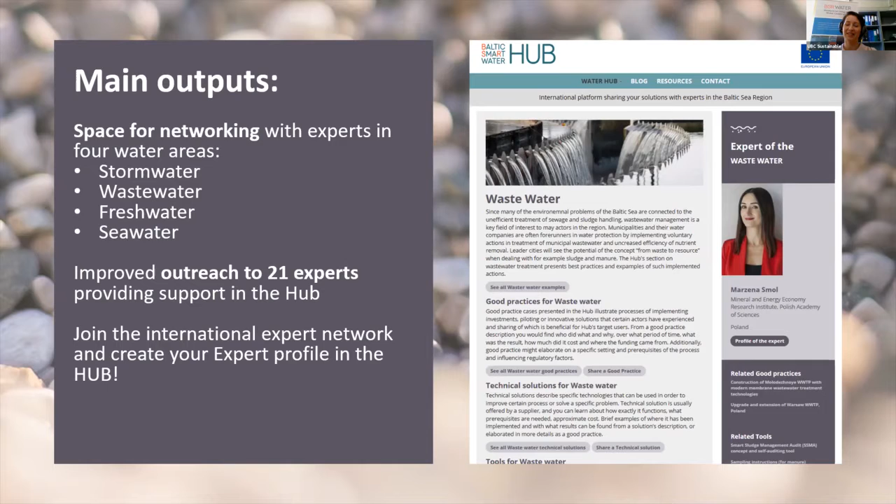So whether it's a good practice, which is a wider application with concrete results of a solution, or it's a description of more technical specifications of a solution, or it's a concrete tool to take up, or an innovation, which is something completely new based more on the newest research. And that's how a concrete case is described in our hub.

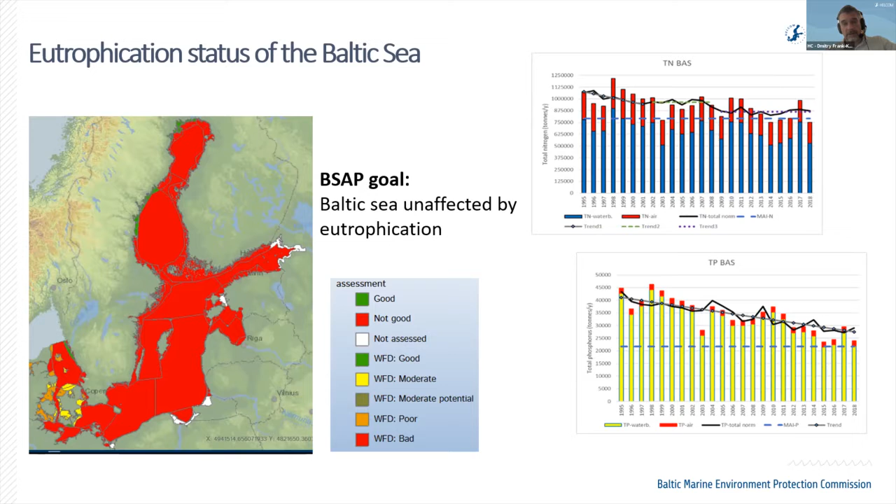So you probably know that despite the whole effort to abate eutrophication of the Baltic Sea, it remains in eutrophic conditions. And as you can see on the diagram to the right of the screen, especially input of nitrogen. This is actually a new picture which was just a couple of months ago published, and it covers the time series from 95 to 2018. And for the first time we can clearly show with all statistical instruments that there is no progress in reduction of nitrogen input in the last decade, somewhere since the middle of the 2000s. It's a much better situation with phosphorus, but what happens with nitrogen is plain stagnation.

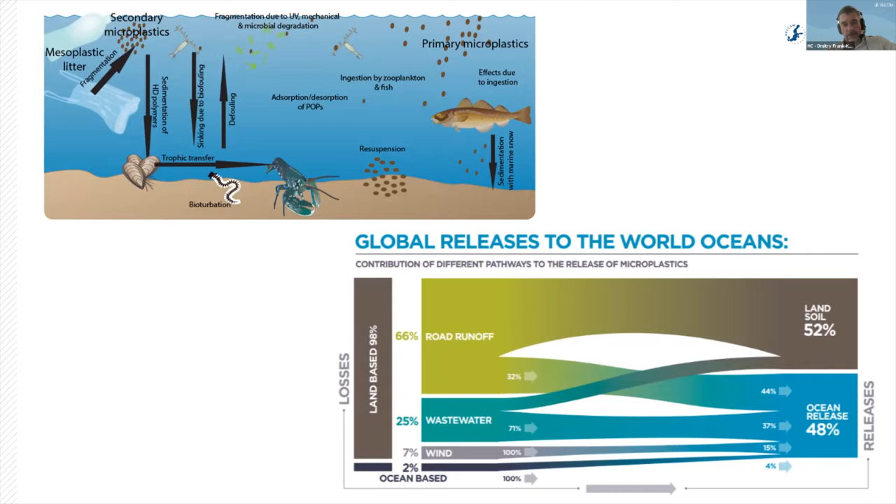And stormwater, I suspect you are well aware about these diagrams, which originate from the NonHazCity project. So you can see that stormwater will contribute to this process with either heavy metals or other organic contaminants. What concerns the microplastics, these are global studies. You know that there are two types of microplastics, primary and secondary. But if we speak about primary microplastics, which come from land-based sources, road runoff is a purely dominating source for them.

It is a remarkable source of nutrients. This is a pathway for a good bundle of hazardous substances. This is one of the major sources of microlitter, and this is a subject of high concern in terms of climate change. So all those prerequisites definitely push HELCOM to do something about stormwater management.

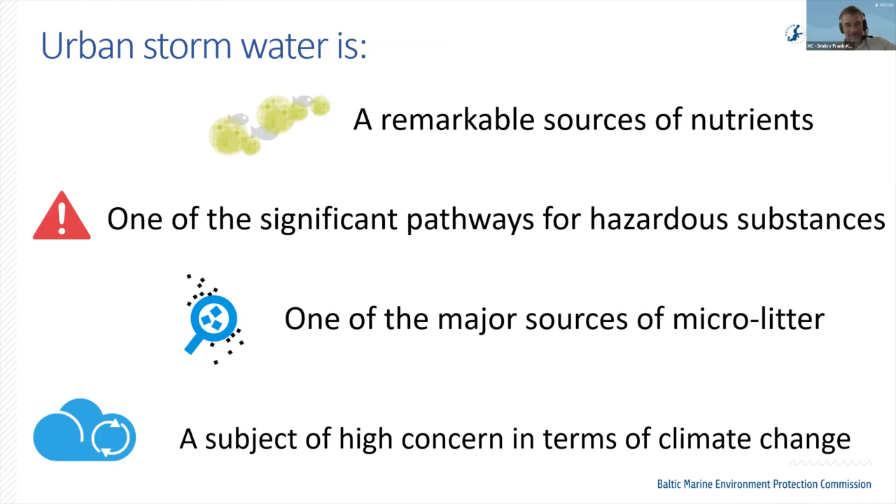Actually, what can HELCOM do? You know that we are not investing, we are not building stormwater systems. What we can do, we can organize a dialogue between contracting parties to the Helsinki Convention using this statement, Article number 3 of the Helsinki Convention, as a starting point. And this says that the contracting parties agree to undertake all measures to eliminate pollution of the Baltic Sea. And this is the only legally binding HELCOM document.

It means that this is a part of our international legislation, legal framework, and mandatory for implementation by all contracting parties. But this is definitely quite a general statement, which can be specified by various other documents. Actually, this is our main work, to produce documents. You can see the hierarchy. All these documents which are listed here are actually politically binding. For example, the Baltic Sea Action Plan.

Probably you know that now we are in the middle, or I would say at the final stage, of the update of this Baltic Sea Action Plan, which is our main regional policy agreement on implementation of the Helsinki Convention and achievement of the good environmental status of the Baltic Sea. But how concretely it should be done is described by HELCOM recommendations. Again, HELCOM recommendations are politically binding documents.

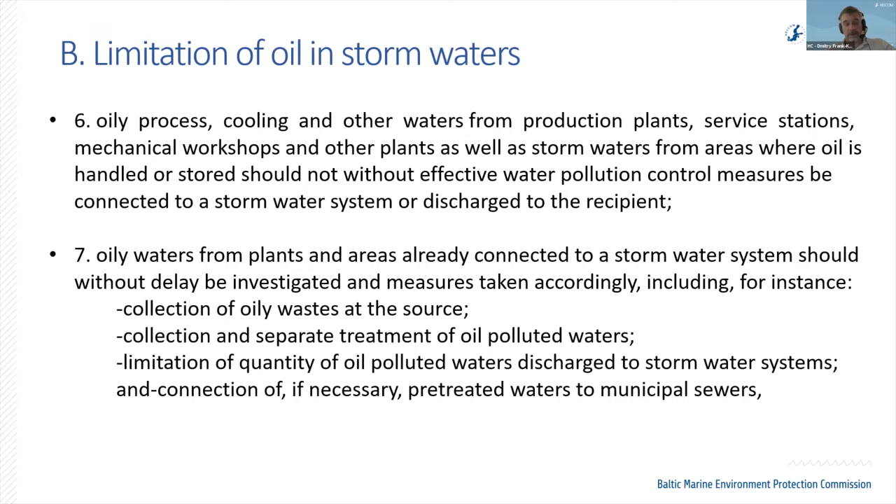And actually, the original recommendation had a number of provisions aimed at preventing pollution, but the main focus was actually oil. And this was the only pollutant which was addressed by the recommendation. And of course, it didn't take into account either climate change aspects or microparticles or anything else. So it was clear for everyone that the recommendation had to be revised.

And a new version was produced, as I already said in the very beginning of this presentation, with good input from the BSR WATER project, and particularly from our colleagues from Riga and from Helsinki. But that was not the only contribution. Also Coalition Clean Baltic contributed a lot, especially with regard to provisions related to mitigation of input of microplastics into the marine environment. So the recommendation was significantly expanded.

Now it includes three main parts: addressing planning of stormwater, specific measures aimed at reduction of discharges, and some specific actions addressing management of high-risk stormwater. And also this recommendation contains two annexes. One, supporting information, describes some concepts which are recommended for use in this recommendation. We will speak a little bit more about them. And then in the end, the reporting format, which unexpectedly became one of the main obstacles for contracting parties, and it was not agreed in full scale, but as a provisional reporting format.

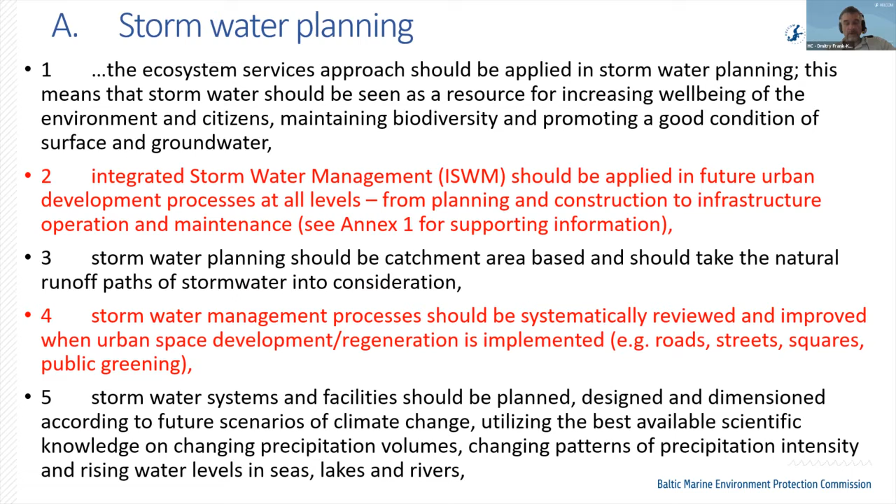Then we recommend that stormwater planning is based on the catchment areas, which actually also caused some discussions between contracting parties. For example, raising the issue of heavily altered natural areas, where we can hardly speak about proper catchments of any water bodies. But anyway, this is recommended whenever it is possible to do. I think these are the main points from this part on planning.

And in the second part of stormwater planning, we also address mainly climate change issues, which means that, first of all, there should be protection of the existing systems against overflowing. And it can be done by building secondary runoff paths.

Then it is highly recommended that all municipalities and all who are responsible for stormwater management would develop water policies, and these water policies and the whole system take into account climate change future scenarios. I know that in many cases it is not done. So actually, all construction is based on past observations and long-term weather or climatic parameters, but hardly takes into account future climate change and future scenarios.

With regard to prevention of contamination and discharges from water, the first thing which is recommended is a so-called hierarchy for stormwater management solutions. It starts from utilization at source, which means organization of areas where stormwater is naturally filtrated into soil. And the most unfavorable solution, but unfortunately unavoidable, is combined sewer systems, when stormwater is mixed with wastewater and directed to wastewater treatment plants. But this is unavoidable. We know quite well that there are many historically built areas where no other solution than the last one is possible.

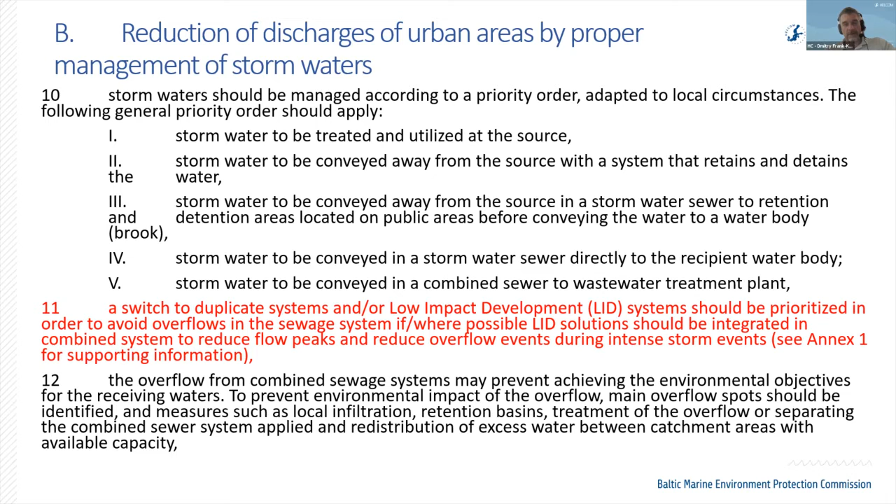But anyway, the general principle is that stormwater shouldn't be flushed directly into the recipient water bodies, but should undergo treatment in retention bodies to retain nutrients, sediment particles and other substances. Many recommendations are also aimed to prevent flooding, which really poses high risk for the aquatic environment.

Then, of course, one of the prerequisites is assessment of the impact of stormwater. Of course, we keep the same. Actually, it is almost transformed from the previous recommendation that measures are to be applied at source to minimize contamination of stormwaters. And finally, what is really new, but probably not applicable for the whole catchment area, is the recommendation to prevent or even ban any dumping of street cleaning snow into water bodies. And I know that in many places it is already implemented.

And finally, with respect to high risk stormwater management, the main recommendation here is that stormwaters from contaminated areas are to be investigated first and treated appropriately on site before discharging into any stormwater management systems.

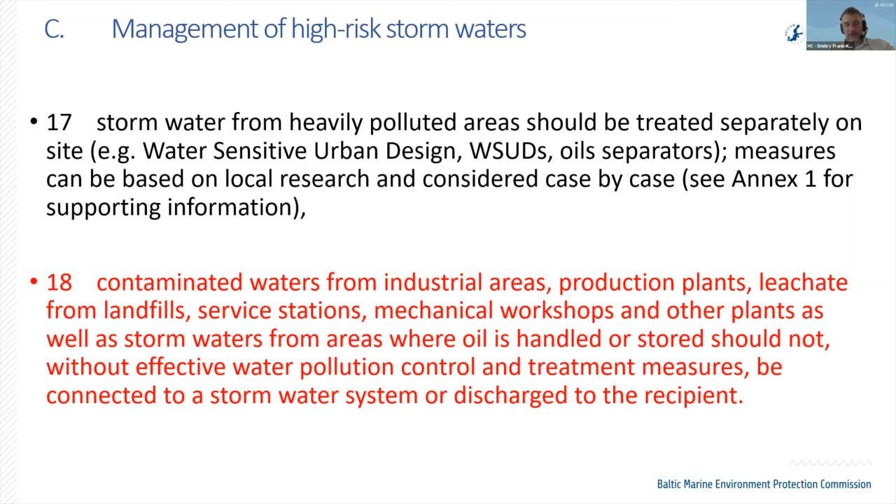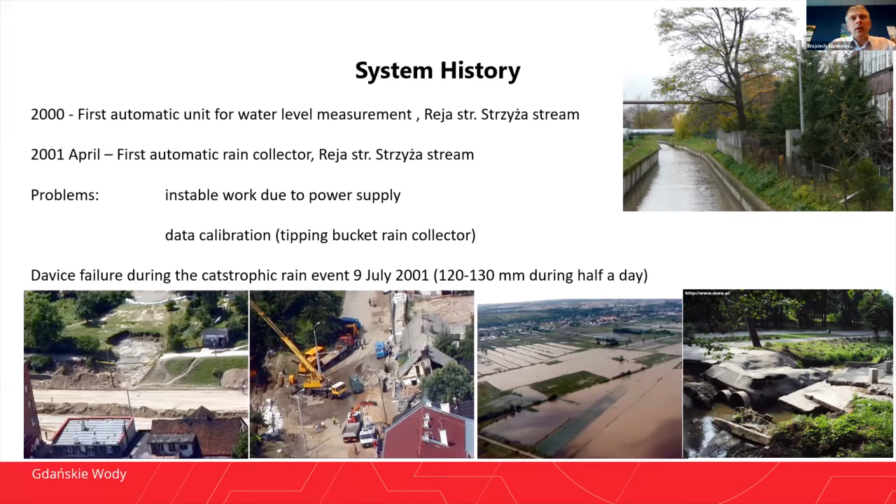Of course, it was the first collector, so we had some problems with unstable work and power supply, and during the first catastrophic rain in this century, the 9th of July, 20 years ago, we had some problems with the data collection, so our information is from the national system and also the Gdańsk University pluviographs.

So during the next years, Gdańsk Water with the City of Gdańsk mounted 7 automatic rain collectors in different places, and this is the base units for the system in Gdańsk. And the next step was the cooperation with Gdańsk University of Technology, and I think Michał will better describe it.

Yes. So in the years 2011 and 13, we started the cooperation between the university and Gdańskie Wody, in collaboration with the Provincial Fund for Environmental Protection and Water Management in Gdańsk. So we undertook the implementation of the stormwater monitoring system in the Strzyża basin. We chose this pilot basin because it is, as Wojtek said, one of the hardest ones. And it was possible to start the project called Monitoring, Modeling and Analysis of the Flood Risk in a Small Urban Catchment, the Strzyża case study.

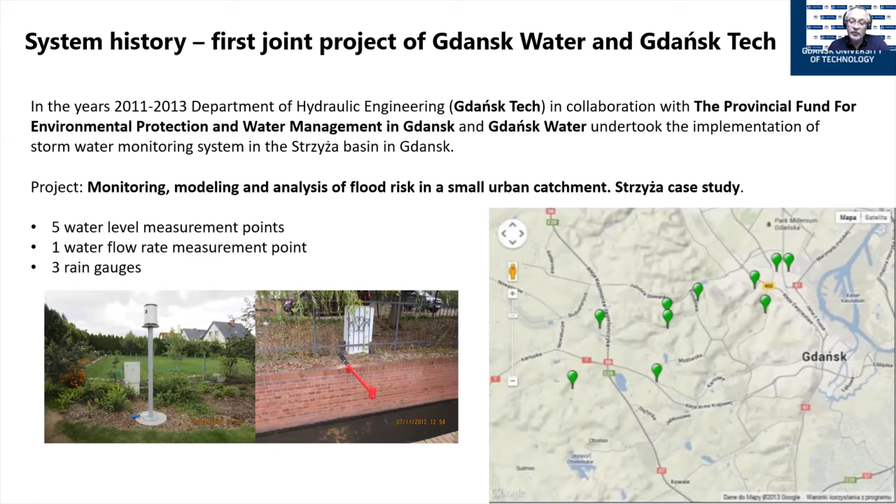And in the frame of this project, it was possible to buy and install 5 new water level measurement points, 1 water flow rate measurement point, and 3 rain gauges. It took 2 years to start with this system, and we started the collection of data about the precipitation and the outflow from the catchment. So it was a beginning, and 2 years later we started the second project related to the Strzyża basin.

It was called Stormwater and Snowmelt Runoff Storage Control and Flash Flood Hazard Forecasting in the Urbanized Coastal Basin. Again, it was a project between two cooperators, Gdańskie Wody and our university, and again it was funded by the Provincial Fund for Environmental Protection and Water Management in Gdańsk. In the frame of this project, we could install 8 new water level measurement points in the Strzyża basin, especially in the retention reservoirs, and we started to build the hydrological model of the precipitation outflow modeling problem. Wojtek, next slide, please.

Shortly, the results of cooperation. After completion of these 2 projects, all measurement stations were taken over by Gdańsk Water and included into the municipal monitoring system. So it is a profit for the city, of course. On the other side, thanks to the municipal meteo and hydrological database, the scientists from our university can conduct research on the changes in hydrological processes in urban basins. So it is a great profit for us, for the university.

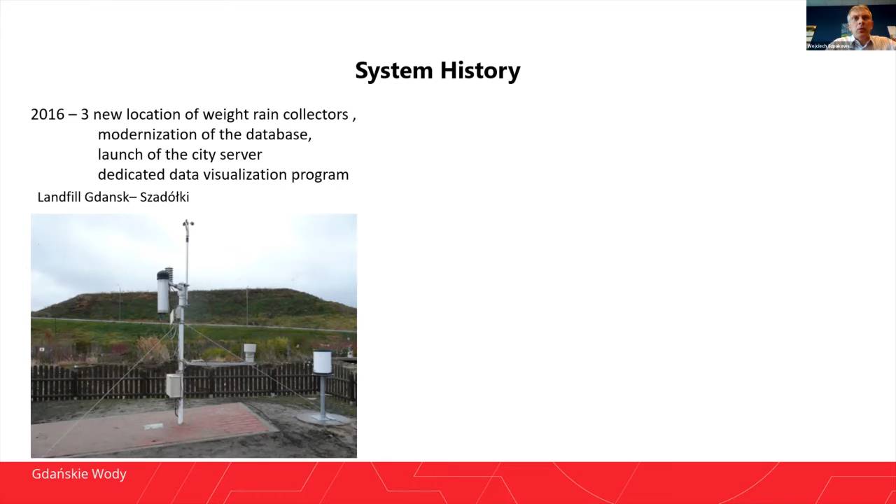Thank you. It can be said that a result of this cooperation is also my position in Gdańsk Water, because close cooperation is also personal cooperation. So the next step was localization of the weight rain collectors, and the results are, I think, the most stable. So in 2016 there were 3 new locations, and the huge improvement of our system was done in 2017 and 18, when we installed, thanks to European funds, 55 new water level units, a meteorological station in the center of Gdańsk, and new weight rain collectors.

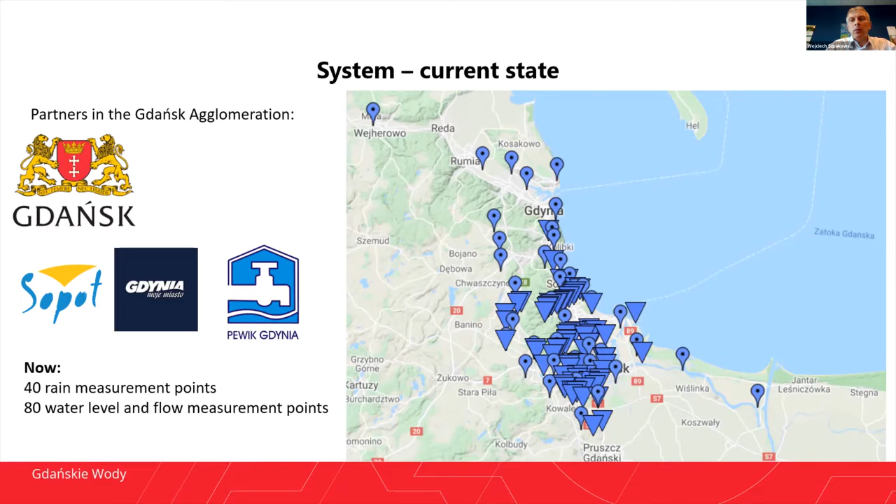We used the technical standard of the Institute of Meteorology and Water Management, and these weight collectors now are, I think, the best as a local system in Poland. The present situation is seen in this graph, where you can see the rain collectors and the water level units. We now have cooperation with cities close to Gdańsk, Gdynia, Sopot, with the PEWIK company, which installed rain gauges in Wejherowo and Rumia, and this is very important for all works and information about precipitation in the whole Gdańsk agglomeration.

The problems, the challenges, of course, you see: pollution, devastation, data transmission errors, calibration, data registration errors. So we have in Gdańsk Water a group of people who handle the maintenance of the system, and problems are rapidly repaired.

The role of the system is very important, and you can see July 2017, when we had rain of more than 100 millimeters in 40 hours. And thanks to this system, we prepared good water management, and there were no damages in the city. You see this Strzyża system and reservoirs Kiełpinek and Srebrniki, and also you see the Matemblewo

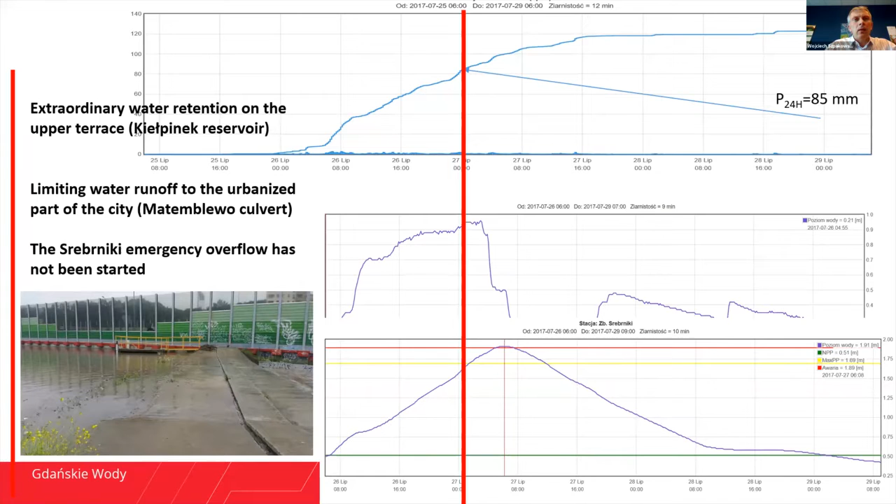culvert. This is the border between the forest and the urban part, the lowest part of the Strzyża stream. And thanks to this system, we saw that 85 millimeters after the first 24 hours gives us a very huge level in this Srebrniki reservoir, and we decided to block the flow from the upper terrace to the down city. In Srebrniki, we reached the water level equal to the emergency overflow. But this was the huge level, and there were no damages.

In the years 2018-19, we had some flash flood episodes, and you see this episode from the 11th of May, when during 30 minutes we noted more than 30 millimeters, nearly 40 millimeters. And you see here the 3 national meteorological stations, and their points were outside the rain event. So the net of our rain collectors is very important, because the small flash floods, more intensive rain, are not registered by the national system.

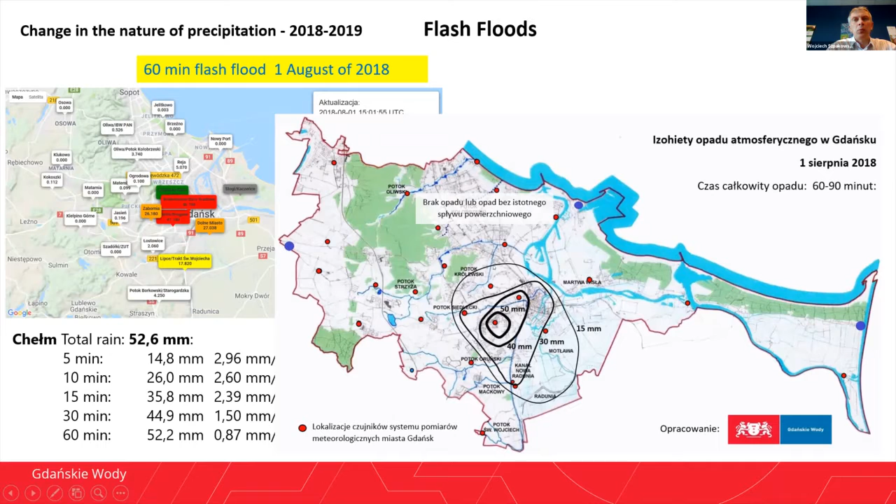And next, you see the highest value. It was the 1st of August 2018. In 60 minutes, we registered in one station more than 50 millimeters. So of course it was some perturbation in the system in Gdańsk. And a very interesting situation was the 10th of June, not this year, but 2 years ago. Sorry for the mistake. We noted 2 flash floods during 3 hours. The total sum of rain was 40-60 millimeters.

We have also some advantages of the system. For example, the very speedy information on social media, and the media of Gdańskie Wody, Gdańsk Water, have a huge audience, more than 10,000 people, and this information is very rapid, very important during the rain moment. And that's why Gdańsk started to change the rainwater management policy. It will be shown in the next presentation. The moment was the year 2018, when stormwater was no longer counted in law as wastewater, but as a source which we should manage.

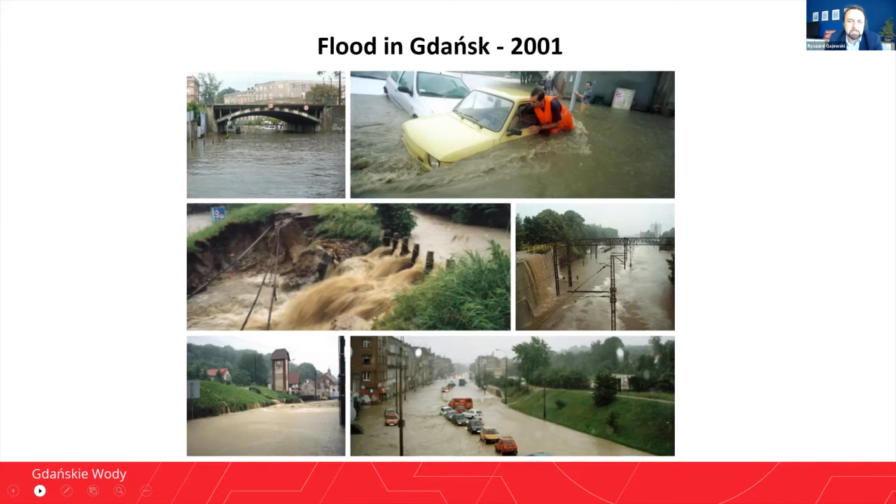It was rain of about 140 millimeters. And 15 years later from this event, we had again a big rainfall, which was about 170 millimeters, and there were also many damages. But in the meantime, the city implemented many water reservoirs, so the damages were not as big as 15 years before. So we expect such events will occur in Gdańsk very often. We face climate change. And we also observe from our monitoring system that the intensity of rainfall is increasing.

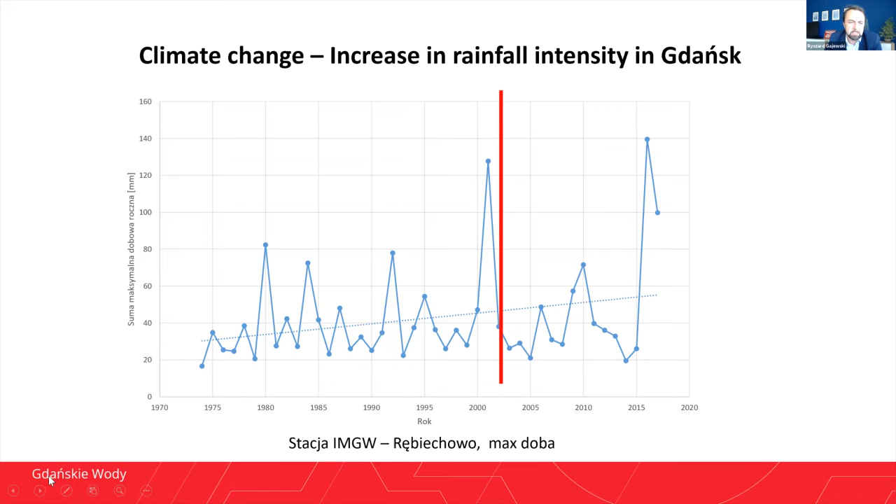When we think about the business of stormwater management, we have to also take into consideration climate change, and we think that we should rather start to name it adaptation to climate change, because this is not only stormwater management. And let me analyze this sentence. What does it mean? How should we treat it?

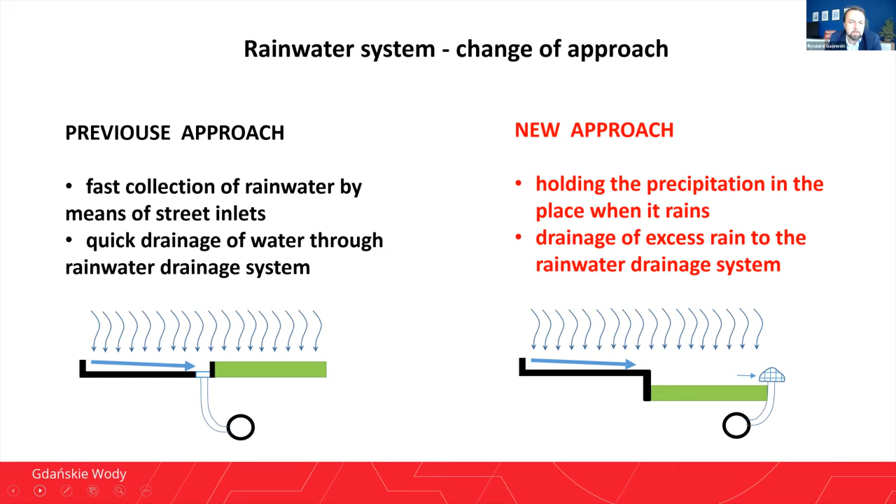So as a result of this new approach, we formulated 3 levels of rainwater management. The first level is concentrated at the property area. The second level is a bigger scale, the urban system, and the third level is crisis management when these 2 levels are insufficient.

So starting from the first level, concentrated retention at the property area, it is addressed mainly to the owners, and we demand that they retain 30 millimeters of rain when the property has a connection to the rainwater system, and if not, 60 millimeters, and also when there is a difficult catchment area. This rule also applies to roads and public places.

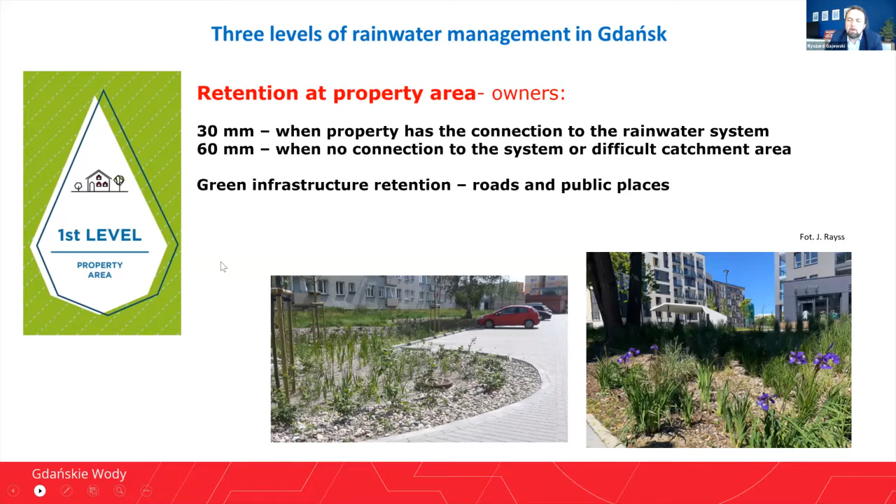How do we implement this level? By means of nature-based solutions, such as rain gardens, bioswales, retention parks. Our company is implementing these solutions as demo sites, and we want to show people, show investors, that it's possible, that you can do it as well, and it's working. More about these tools will be in the next presentation.

And also we think that these tools can be implemented on different scales. Starting from the property, this is the smallest scale. Then the bigger scale is the district area, where bigger objects can be implemented. Then we have streets, where along the streets or between the pavement and the road, we can implement different greenery solutions to retain stormwater.

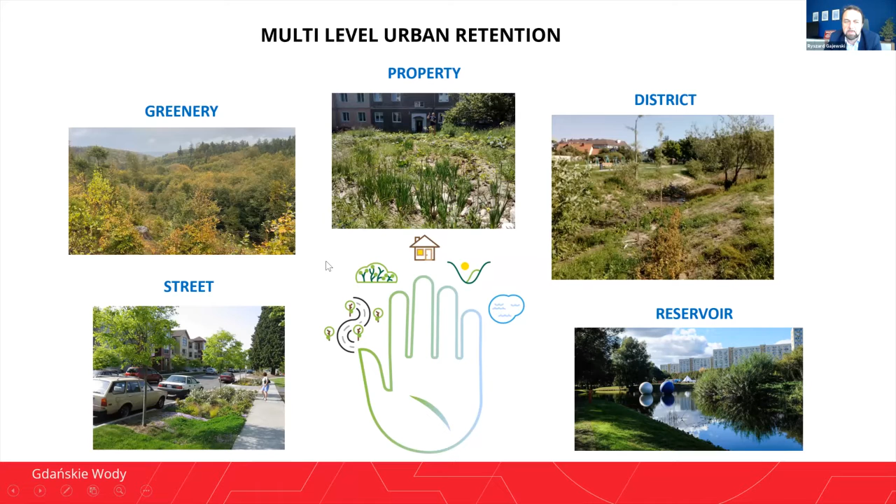The second level of our system is these water reservoirs. So when the first level is insufficient, water goes by means of the drainage system to the water reservoirs, and this is the last place where we can stop the water. These reservoirs are designed for the rain which occurs once per 100 years.

And we have quite a big system of water reservoirs in the city. There are 54 such reservoirs, and as you can see, we try to design them in a way that they look like ponds. They don't look like concrete objects. They look like ponds or natural lakes.

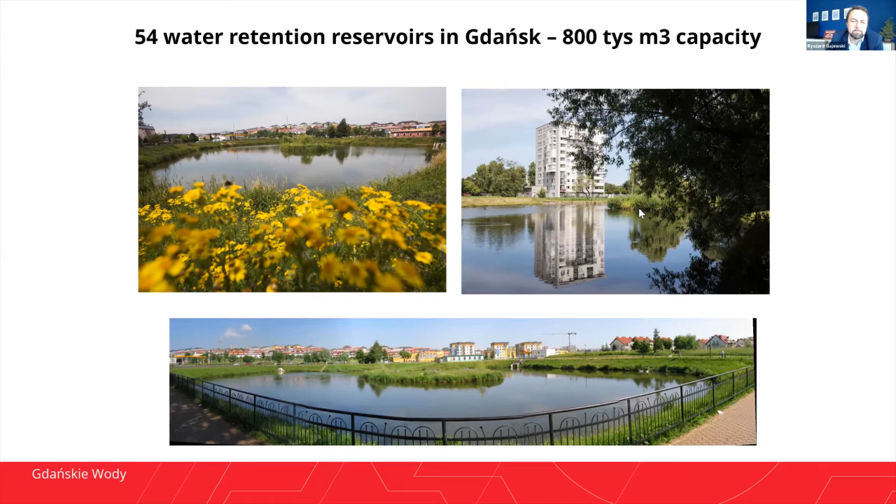The third level of our system is crisis management when the water is bigger, because it can always happen. So we have to be prepared for quick response, and the city services are concentrated on protection of buildings against flooding, pumping water from flooded places, unblocking grates and inlets. So this is the last level of protection, which is important in order to minimize the damages in city infrastructure.

Of course, our system is supported by our urban monitoring system, which was the topic of the former presentation.

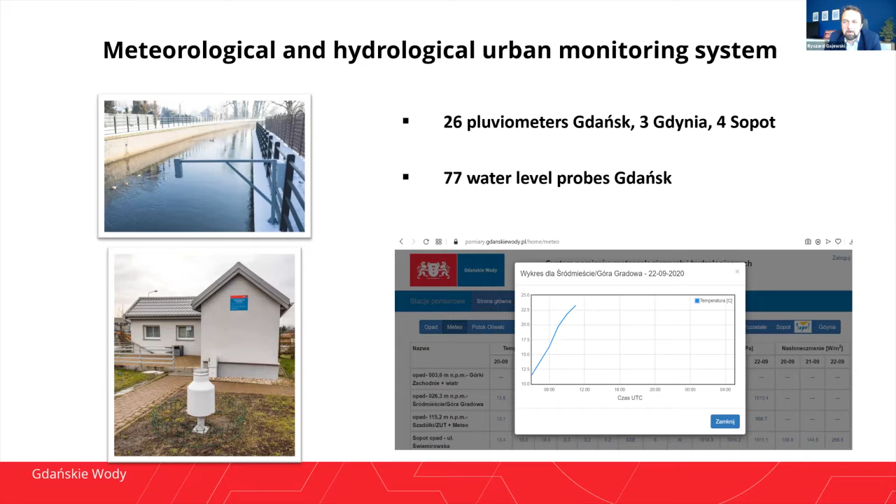Sorry to say so, but you didn't manage to save our time. So now it should be the presentation of Agnieszka Kowalkiewicz, but she had a certain health issue, so we cross fingers for her. She's in a hospital, and we wish her to come back to us as quick as possible. But Dr. Małgorzata Drewnowska promised to do her best today in the morning. So please, Małgorzata, share the screen, and I know that you do as good as Agnieszka. So the screen is yours.

Thank you very much. I will try to do my best. I will share my screen now.

Okay. The presentation was made by my colleague Agnieszka Kowalkiewicz. She is the head of the climate change adaptation. I will try to replace her and tell you something about the tools to implement the blue-green infrastructure in our city.

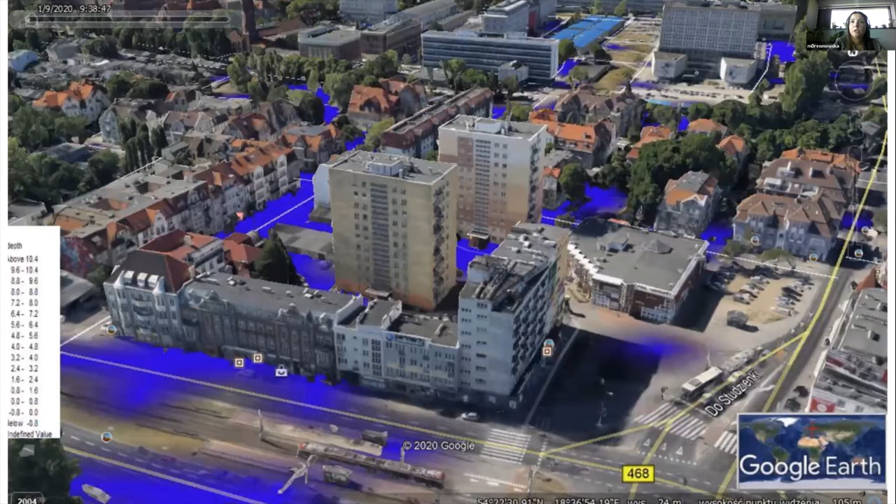We also do field inspections. We use geographic information systems, and of course analysis of the planning documents and city policies or flood hazard maps. Here you can see the maps from the flood screener. These maps were made for the whole city and for rainfall of 60 and 100 millimeters.

Step 2 is the site selection. Most of the criteria are the range of influence, neighborhood, district, and frequency of flooding occurrence. And step 3, implementation of the demonstration. We are inviting residents and children, who very much enjoy such activities, to create rain gardens with us. Children are helping us. They also have the opportunity to learn more about climate change and the solutions to adapt the city to climate change. They had a lot of fun and learning simply.

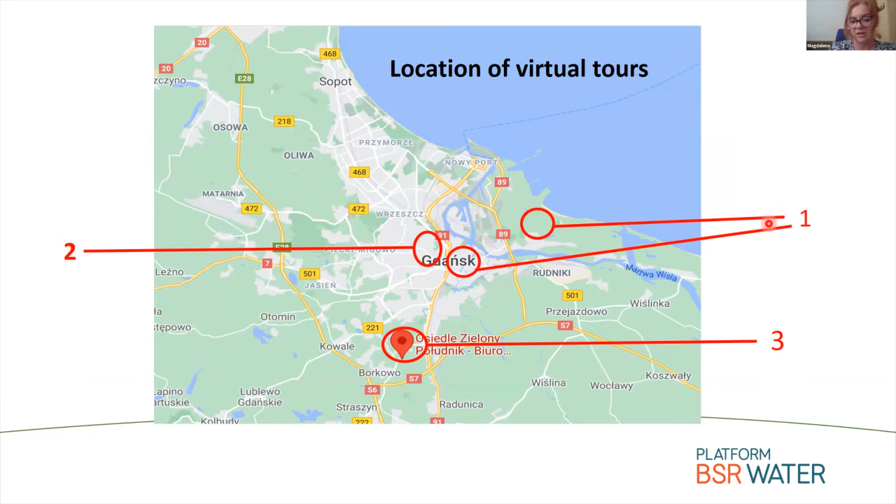Now it's time for visiting rain gardens. The first of these visits you already had, actually point 2. So we have 2 more movies, and we are going to go to 2 locations. The first location is actually a very big system, which was mentioned today already. It was the first one which was constructed, and this system impressed a lot of people from the Netherlands.

Now I would like to show you the movie. I don't know if I managed to do this. No, I couldn't. So maybe we go through my presentation, and then I will ask for help to show the movie. It's not working on my computer.

So very sorry, but please keep in mind that this is the system which was introduced as the first one, and the movie was done by Professor Floris Boogaard. He is also one of our experts in the BSR WATER platform. He represents Delft University of Technology and Deltares, and he was with his colleague visiting our university, and during the visit he asked us to show the rain gardens, and he was very impressed, and then he put all this information on a climate cafe point.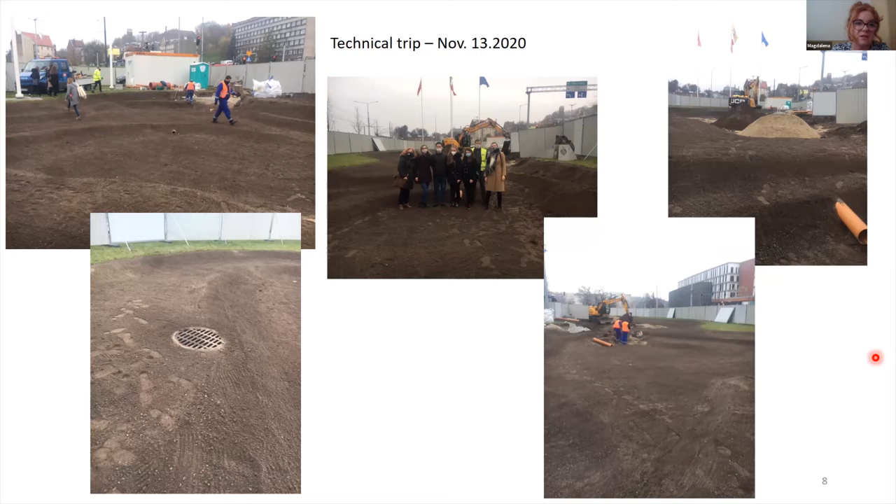Together with students, we visited this during the construction, because I think that for students it's very important to see how this construction looks, and my students also enjoyed planting the plants a lot.

And the next movie, the last movie, is actually done by people from my university in cooperation with Gdańskie Wody. It's for housing estates. It's designed by a colleague of ours, and it is designed according to guidelines given by Gdańskie Wody. So you can see an example of how these tools could be implemented in reality.

And I would like to leave you with a quotation: an efficient stormwater urban surface retention system might provide retention in many dimensions, in which all retention levels are equally important and complementary to each other. And at the same time, such multi-level retention needs to provide as many ecosystem services as possible.

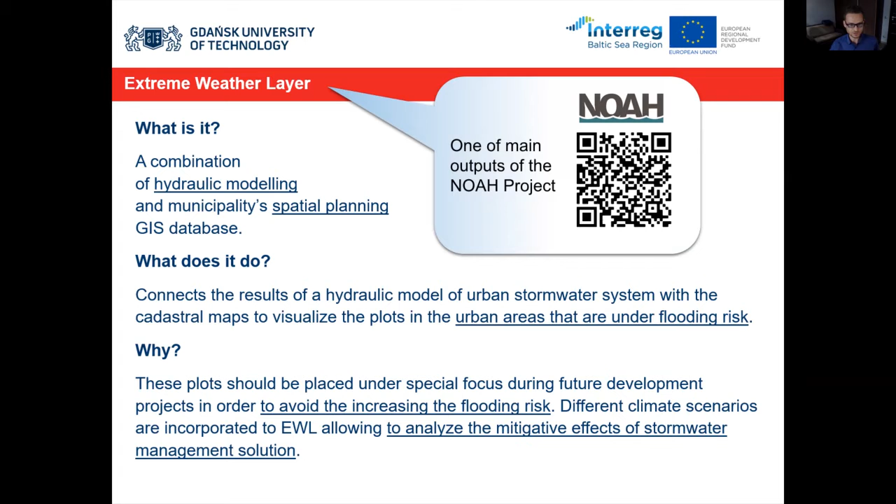This tool is validated in 8 cities participating in the NOAH project, and one of the cities is Słupsk. And here you can see the main steps in the implementation of extreme weather layers.

So to prepare this planning tool, the steps are quite similar to those presented in the presentation before mine. There were 7, 8 or 9 steps. And here we can see a little bit less, but the scope of activities is very similar.

So first of all, we have to prepare inputs, then develop a hydraulic model, define climate scenarios to be analyzed, and finally identify places where the flooding will occur. And this flooding should be categorized with some classes, which in each city will be different based on expectations of the municipality. When the extreme weather layer is ready, it can be used for various purposes, and these purposes are shown on the bottom of the screen.

It can be used to adjust the planning in the city and to test different scenarios of the spatial planning, and to evaluate if after the implementation of some strategies there will still be remaining flood risk. And then the cycle can be iterated again, and the spatial planning can be virtually improved, at least in the first phase.

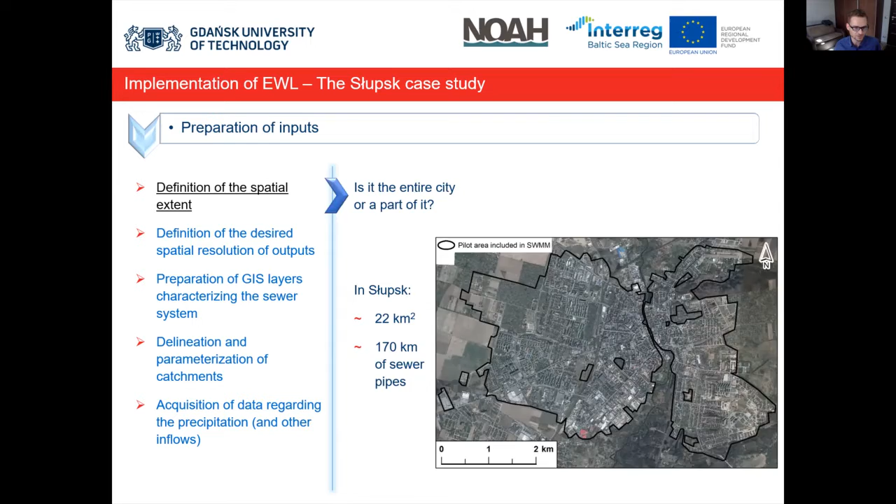Then we have to define what is the objective of this tool. Do we have to have calculations done for the drainage area of all manholes? Do we need to have the flooding calculated in 3 dimensions? I mean, to calculate the spatial extent of flooding of each manhole, or is it enough to calculate the flooding for some sub-areas of the city? The second approach was adopted in Słupsk, which we have divided into several hundred sub-catchments.

Before we start preparation of the extreme weather layer, we have to gather a large amount of spatial data describing the drainage system. We need to collect all information that affects the flow in the sewage system. So the most important is the geometry of the system and parameters affecting the flow in the system, so material, age or some other features.

When we have described the sewer system, we need to describe also the drainage areas in the city, because different parts of the city can contribute different types of inflows. For example, in Słupsk, we have a combined sewer system in part of the city, the orange areas, and we have separated systems in the green area shown on the picture.

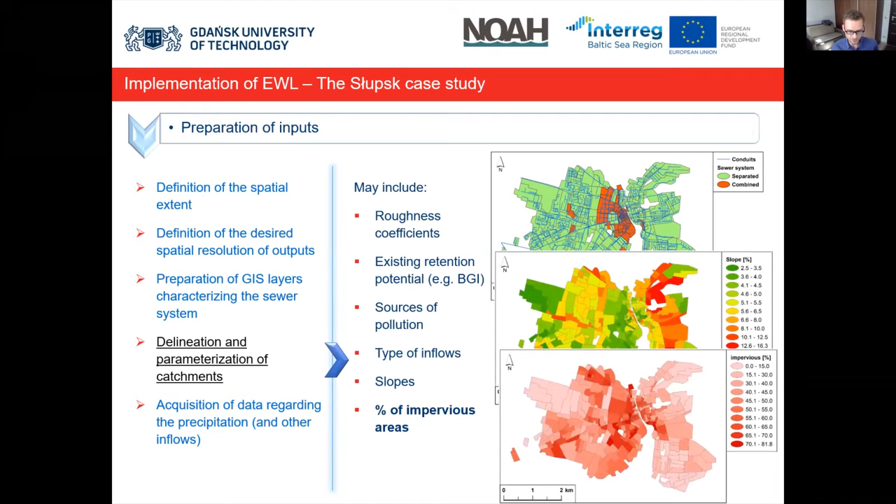So we have to calculate inflows from both types of these sources, and to do this, we need to have parameters affecting the flow, the surface runoff, in all subcatchments. So this is, for example, slopes and percent of impervious areas in all catchments.

And the thing we need mostly in such analysis is the information about inflows. First of all, it will be precipitation. In extreme weather layers, we analyze rain events of various duration and probability of occurrence. These characteristic events can be calculated based on long-term observations in the city or near the city.

In addition to this, we can use longer periods of observations in extreme weather layers. And in Słupsk, these observations are based on 6 new rain gauges installed in 2019 as a part of the NOAH project. So in addition to these separated rain events, we also analyzed what happened in the entire 2020 in terms of flooding and flows in the system.

We have also some other inflows to the system. It is infiltration, which occurs in most drainage systems in cities. But in some cities, we also have production of wastewater where a combined sewer system occurs. For these wastewater inflows, we have prepared temporal patterns based on observations of the flow rate in the sewer system in dry seasons.

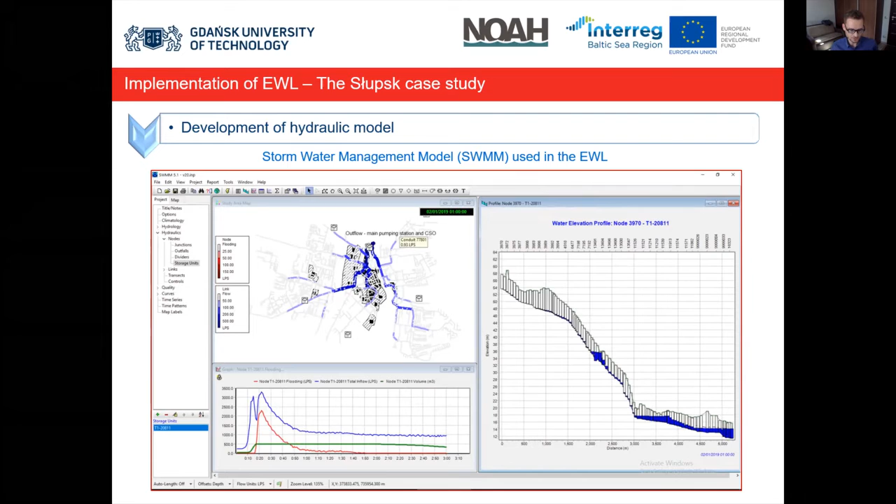All the input data was put to the hydraulic model. In all cities participating in the NOAH project, the model was Stormwater Management Model. And in case of Słupsk, the model was validated using the hourly outflows from the sewer system, and the validation gave us quite satisfactory scores in terms of the correlation and Nash-Sutcliffe efficiency coefficient, both for dry periods when only the wastewater flows in the system and wet periods when heavy rain occurred.

And the final phase of the preparation of the extreme weather layer was the definition of climate scenarios which will be analyzed in this tool. For Słupsk, we have chosen RCP 4.5 and the more severe RCP 8.5 scenarios, and we analyzed 2 time horizons, from 2051 to 2060 and more distant from 2091 to 2100.

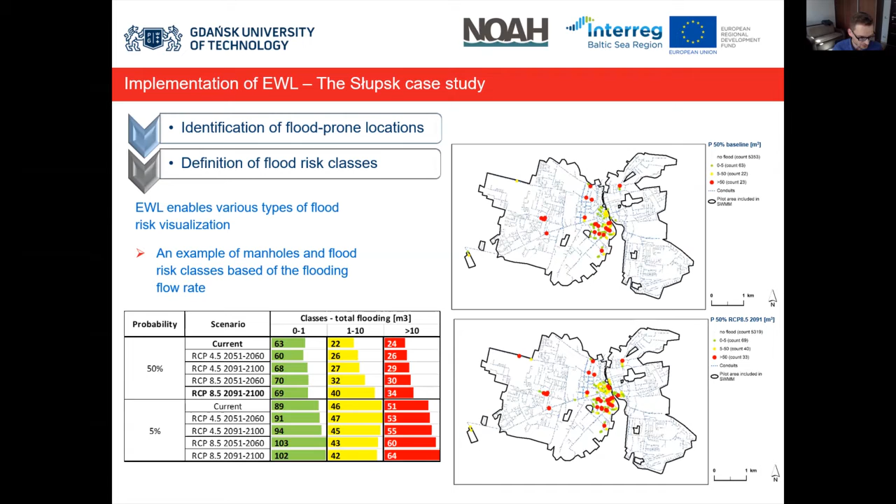The extreme weather layer in Słupsk was also used not only to identify the places where flood can occur, but also on the request of the company which is administrating the sewer system in Słupsk. On their request, we have prepared also a calculation of what part of total inflow to the wastewater treatment plant originates from something else than wastewater.

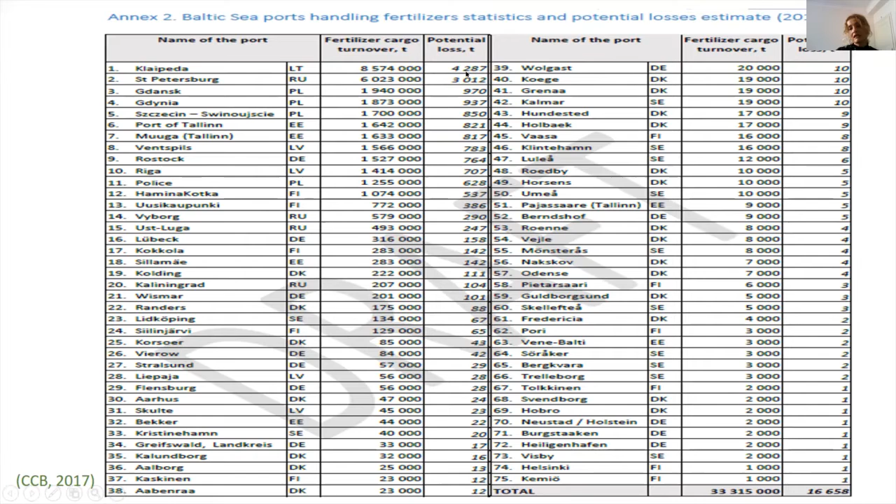And here you can see another table from that report, where you can see the turnover of the cargo, fertilizers, and the potential losses. But unfortunately, if you read the report, you can see that in the case of Poland, there is really a lack of data even about the fertilizer cargo handled in the Polish ports. So we can say that accurate estimation is really missing, and therefore we should take some actions to fill the gap. And when we have the proper estimation, then we can undertake mitigation actions.

Then we try to find out how we can mitigate the problem of this discharge, these contaminants from the ports, and then prototype and business modeling. And currently we are almost done with work package 3.

At the very beginning, I would like to show you how complex this topic is, because we have found 3 main challenges: sampling approach and how to sample, where to sample, and what parameters we should focus on. Maybe you think these are trivial challenges, but actually they are not trivial. I would like to show you on the example of Gdynia port that it's quite difficult to handle these challenges.

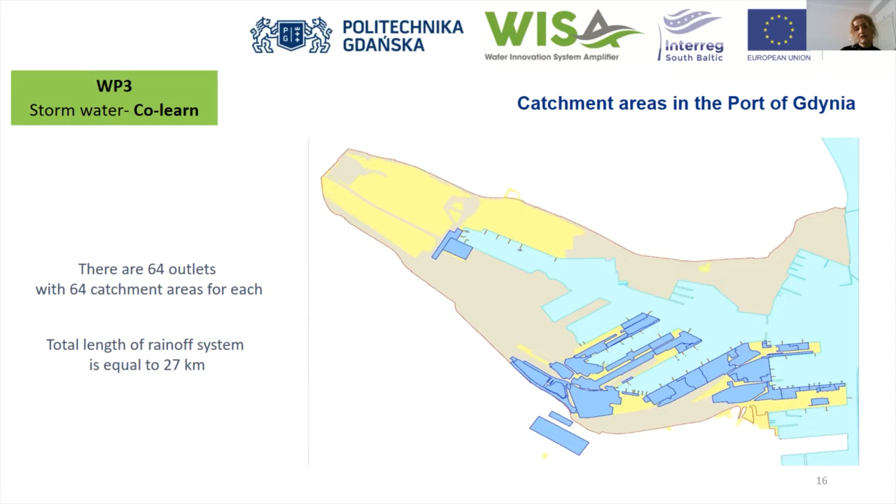Another important topic is the complexity of the system, because here we have 64 catchment areas and 64 outlets. This is a huge area as well; the total length of the system is 27 kilometers. The port authority has separate water law permits for each outlet, and in general the limit of total suspended solids shouldn't exceed 100 milligrams per liter, and polycyclic aromatic hydrocarbons shouldn't exceed 15 milligrams per liter.

I would like to show you archive data with the range of the different contaminants found in the reports of Gdynia port from the 1990s until now. Oh, sorry, one more thing. To achieve these permits, there are pre-treatment devices, mainly separators and settling tanks. They are located near each outlet, and they are cleaned twice a year by an external company. The monitoring of the stormwater is also done by an external company twice a year.

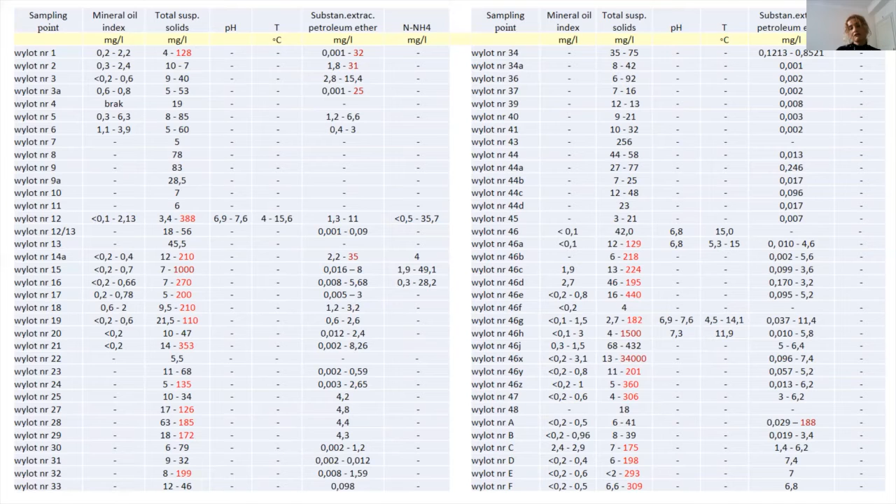Here you can see the data I was talking about, historical data from the 1990s. You can see the ranges of the contaminants in different outlets, and total suspended solids can sometimes reach quite high values. So this is the kind of picture we face. But of course, we would also like to get our own data.

In the first challenge, sampling approach and how to sample, we have questions like how to get reliable data in ports, or how to make sampling less complex. If we focus on grab sampling, which may seem more feasible, we have to imagine that the port is a really huge, busy place with a lot of traffic, and there are so many outlets that we cannot take samples at the same time. Also, we are not allowed to take the samples because an external company does so, so first flush is probably not always collected.

Another thing is that the outlets, depending on the sea level, are very often partly or fully submerged, and sometimes the backwash of marine water can even reach the settling tank. This is quite important information. But anyway, we decided to focus on some outlets just to get an idea of the quality of this runoff water, and we can show you the results.

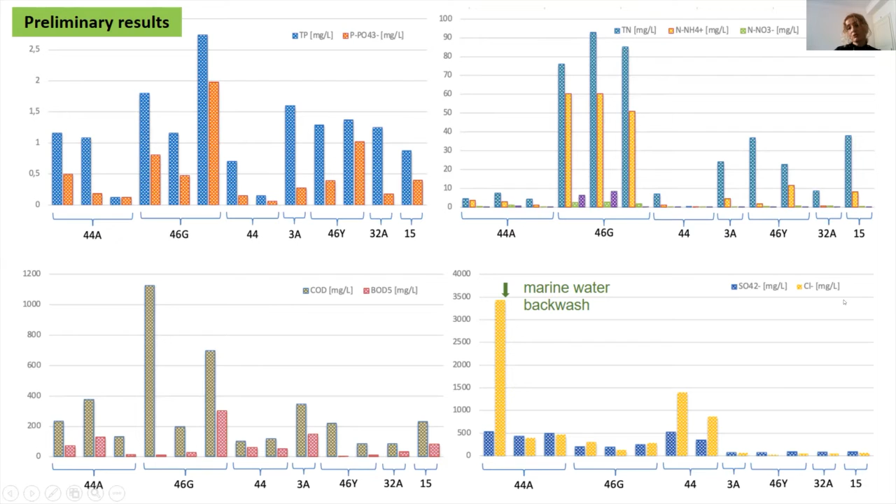Fortunately, phosphorus is not such a big problem here. But of course, we can see some problems with nitrogen and with chemical oxygen demand. We can also observe the backwash of marine water because we have been analyzing the chlorides.

And having this information, we decided to design an autosampler which could provide us more detailed information about the rainwater quality with time, how it changed with time depending on the rain intensity, depending on different aspects connected with the other things related to the port, like cargo handling and stuff like this.

So we decided to choose 2 points, and as in real life, there are also some challenges connected with the auto-sampling, because first of all, is where to locate the auto-sampler to have these representative or worst scenario results, because the auto-sampler has to be safe. And as I said, this is a really busy place, and there are a lot of trucks running every day in the port area. And of course, it needs a power supply. So this is another challenge.

And another thing is that the equipment shouldn't be influenced or even destroyed by the inflow of seawater, or the analysis cannot be impacted by the seawater backwash. And another thing is the sampling, how to design the sampling, how the samples should be taken to provide us the information, since you cannot foresee what kind of intensity of the rainwater you will have.

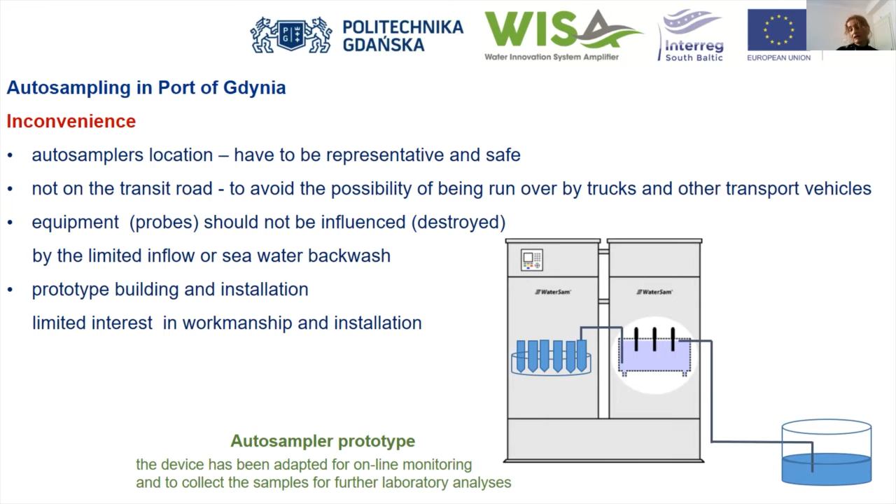So our idea to design this autosampler is a kind of prototype, and this device has been adapted for online monitoring. So some parameters we will have with online monitoring, and others we would like to analyze in the lab. So this is also a possibility to collect the samples and to analyze them later on in laboratory conditions. So here you can see how the implementation of the autosampler looked. It was in late March, but it was still very cold in Poland. So it was still a bit challenging for us.

But anyway, we can say that we can analyze conductivity, redox potential, pH, ammonium nitrogen, and chemical oxygen demand online. And this autosampler is located at that point, so it can give us the information about the rainwater in this area. And another thing, having more detailed information about the rainwater quality, we can go to the next work package with it, which is connected with the solution, how to mitigate that problem.

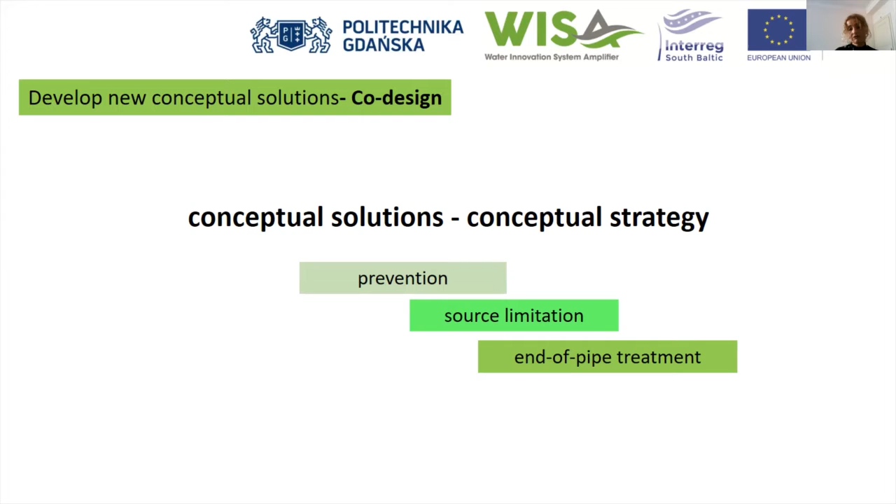And of course, as everywhere, the main strategy which is used is prevention, source limitation, and then end-of-pipe treatment. So in the prevention, we have big support from the Race for the Baltic project. And I think that I have seen Fanny Tam in this meeting. So yes, we really rely on the data which were obtained in that project. And this is big support for us. So thank you, Fanny, once again.

And another thing is the storage, open storage, which quite often takes place in Poland. So this is like a source limitation. And the end-of-pipe treatment, we are just approaching this work package. So we hope that we can provide you more information soon.

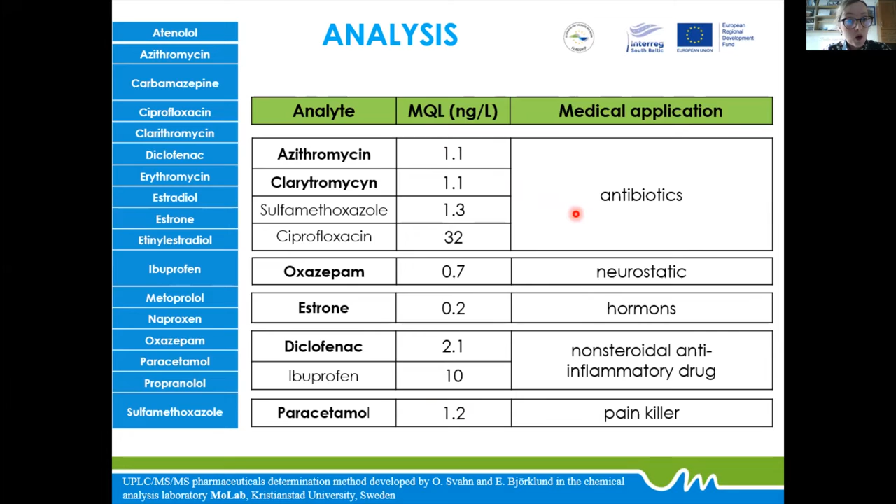However, our method was really good, I would say, because the quantification limit is at the level of nanograms per liter. That is really important when you would like to ask some laboratory for analysis. This is extremely important for monitoring technological solutions, because we need a reliable method for determination of pharmaceuticals.

Having these two data sets, consumption and pharmaceutical analysis, the idea was to compare the data and see how it can be useful for pharmaceutical evaluation. In order to predict the actual pharmaceutical load reaching the inflow of WWTPs, the predicted incoming load, the excretion rate and size of the WWTP have to be included, as well as the calculated intake of each pharmaceutical. Excretion rate is a parameter which describes the share of the consumed pharmaceutical dose which is not metabolized, but released by the human body via urine or feces.

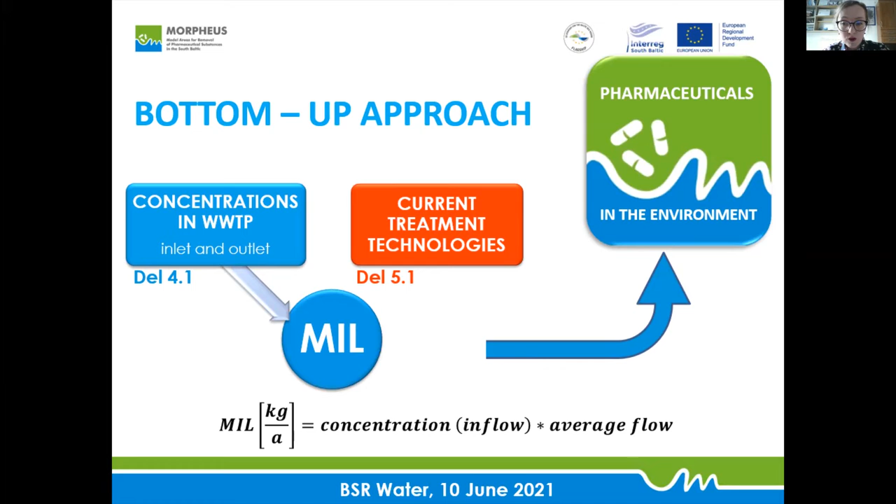Despite the average rate suggestions by literature, it is well known that excretion rate is substance specific. The second approach is the bottom-up approach, when we are taking samples in the environment and determining the actual burden of pharmaceuticals. This is actually the basis for the bottom-up approach. From the concentrations we have found, we may calculate the measured incoming load, multiplying the concentration and the annual average flow of wastewater.

Having these two approaches, the question was: how do the data obtained from those approaches correlate? Does a correlation exist? Or maybe we found some interesting conclusion after comparing them. All of the results are presented in deliverable 4.2. I just wanted to show you one sample, actually the best one, carbamazepine, where these two values really nicely fit each other.

There is one exception, the Degeberga wastewater treatment plant in Sweden. This is a really small wastewater treatment plant, 880 inhabitants connected, and here we did not have a really nice match. However, if we look, we actually get a linear relation between the measured concentration and the concentration predicted using consumption data.

So what is the conclusion? It might be concluded that carbamazepine is a good candidate to be used as a predictor of the expected chemical load to a wastewater treatment plant using consumption data in a certain region. So with such an approach, we could eliminate the cost of measurements. This would be one solution for this approach.

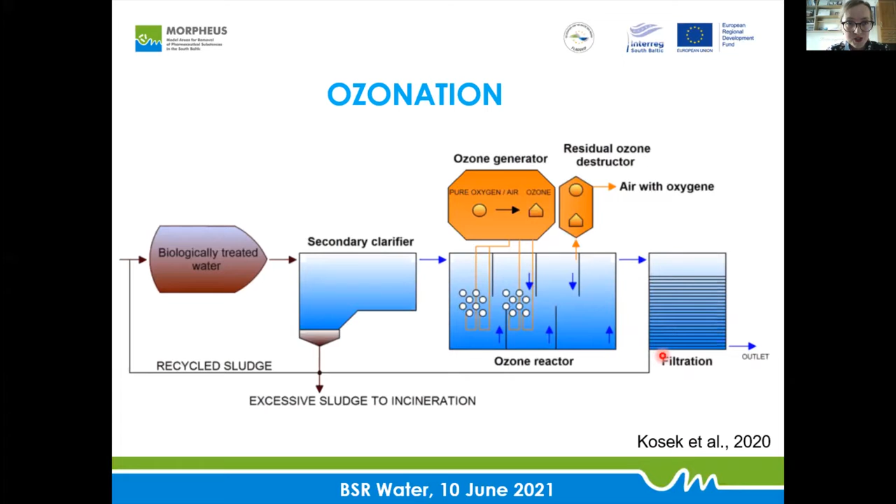Another advanced treatment technology is powdered activated carbon, which may be added to a separate contact reactor, as well as to the biological reactors. The advantage of this solution is no formation of byproducts. However, in the case of PAC, separation of PAC is needed at the end, so we need another device for that. Another disadvantage is that we need a place for storage and handling of PAC, so there is explosion risk or abrasive wear of pumps and pipes.

An alternative to PAC is GAC, granular activated carbon. It has the same advantages as PAC, but it doesn't need the storage and handling. That is also a good thing. The only thing is that for GAC, pretreatment is crucial; we need really good parameters. For example, the suspended particulate matter needs to be at a certain level.

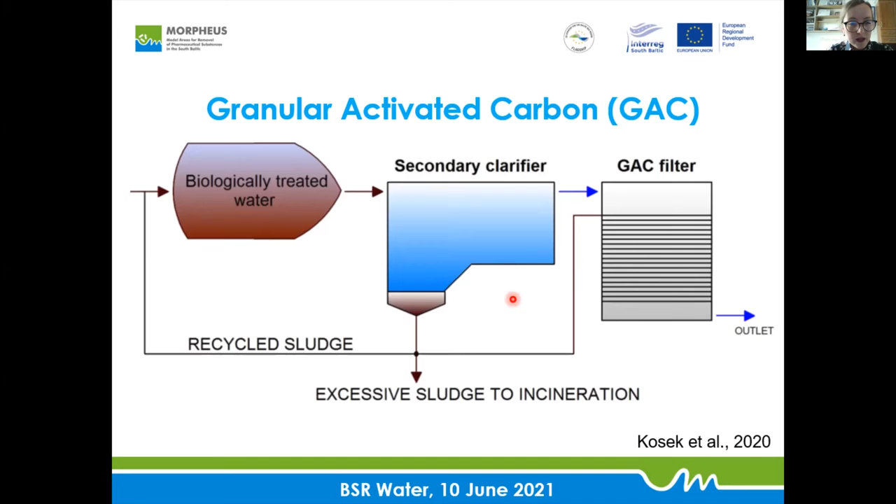Having all of this information about the consumption, measured concentrations, comparison of measured and calculated concentrations, as well as knowledge about the existing and advanced technologies, the final step was a proposition of roadmaps. So solutions for 4 WWTPs, 1 from each country. We proposed advanced treatment solutions for each exact studied WWTP.

Today I prepared for you the example from Gdynia Dębogórze, but all of the examples are presented on our website. So if you are interested, I invite you to our website. In the case of Gdynia Dębogórze, we propose an ozone treatment unit and back filtration.

So regarding ozonation, I just put here the cost comparison because of limited time. Of course, we also evaluate and consider pros and cons of these methods, but having the cost, in case of ozonation, the initial costs are kind of high, for example, in comparison to GAC. However, considering GAC implementation, we need to consider that filters need to be changed for Gdynia once per year.

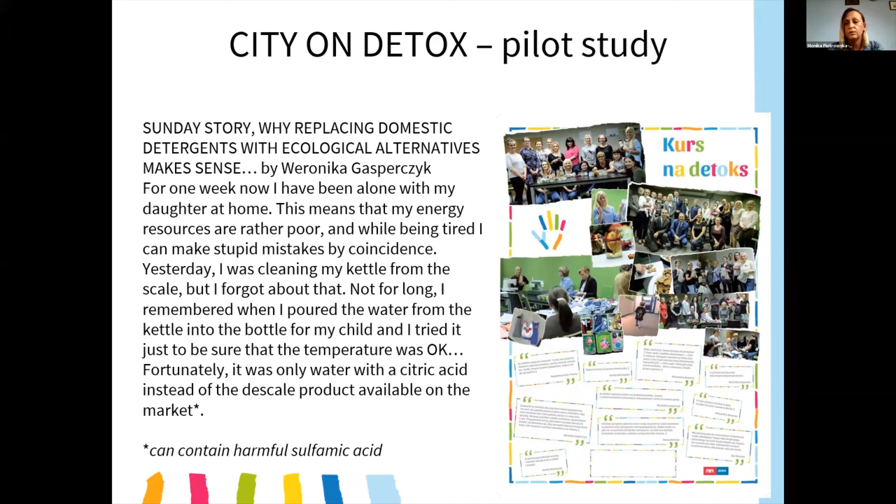So I hope it speaks for itself. Because the project and the campaigns were very successful, we applied for financing the second stage of the project. And we received this financing from the Interreg program.

In this second stage, we mainly focused on producing a lot of educational materials that can help people to change their habits, their activities and consumer behaviors without special advice or support from experts. So we produced a lot of different brochures. Some of them are dedicated not only to inhabitants, but also to business groups like the gastronomy sector. We also produced some videos.

There is an internet app available to check the exposure to endocrine disruptors, both at home and at the office. And at the very end of the app, when people fill it in, they not only receive information about their exposure, but also they receive some recommendations on what to do to change.

We also focused in the second stage on the plastic problem, because as you probably noticed, most of those compounds, especially endocrine disruptors, are added to plastic products. Through those activities regarding plastic, we wanted to show that plastic is not only a waste problem, but also a problem related to the possible emission of hazardous substances. So we organized an international seminar in April this year.

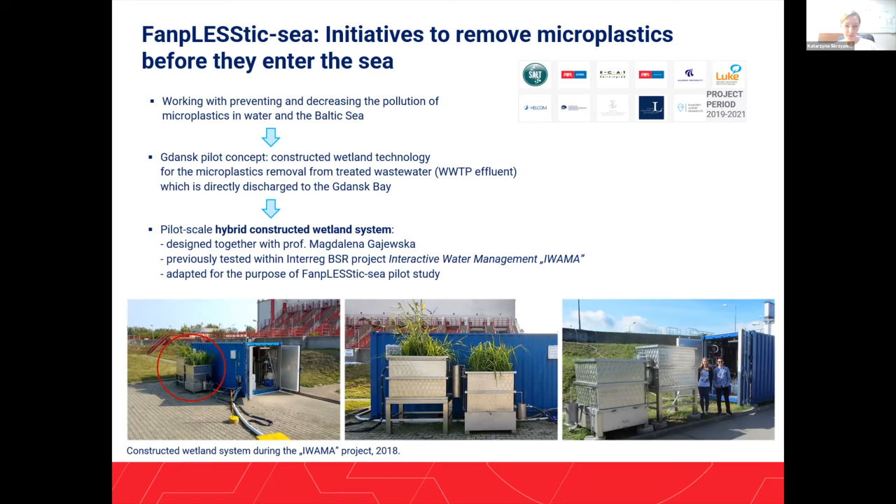The pilot station was designed together with Professor Magdalena, and it is a pilot scale hybrid constructed wetland system. We are now working on adapting this station for the purpose of the current FanpLESStic-sea project and pilot study. On the pictures, you can see how it was operated and how it looked in 2018.

The concept is based on a hybrid system. The first stage of treatment is a horizontal flow constructed wetland, and the second stage is realized in a vertical flow constructed wetland. Together, they provide higher efficiency of pollutant removal, which was proved during the previous project. With the combination of horizontal and vertical flow, we can combine the advantages of both constructed wetland beds.

The research that we are going to do is focused on determining microplastic removal efficiency at different subsequent treatment stages. The first sampling point is raw municipal wastewater, taken from the inlet to the wastewater treatment plant. The second sampling point is the outlet of the plant, so the mechanically and biologically treated wastewater. And of course, the third stage of treatment is our pilot station.

We are hoping that we could get samples from the third stage, so the horizontal flow bed as well as the vertical flow bed. Already last year in October, we managed to do the sampling campaign on the raw wastewater and on the outlet of the treatment plant. And now we are focusing on the pilot station.

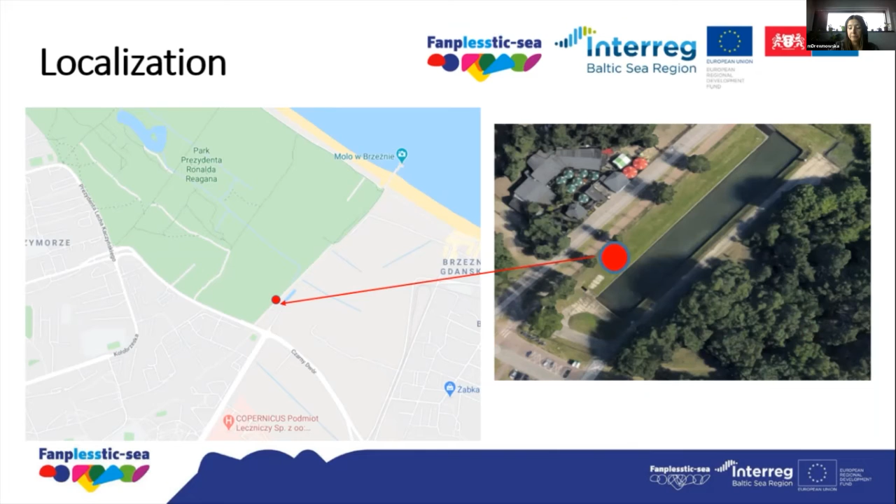For this purpose, we used the common reed and properly selected filtration beds. What was very important for us, we couldn't use any plastic elements in the station to avoid contamination, of course, and incorrect results. The station is located near the place where the stormwater from the stormwater collector is discharged to the Baltic Sea. And it is a system of steel tanks. The stormwater from the stormwater collector is firstly directed to the first tank. This tank is equipped with the online measuring system.

There are some probes that measure pH, conductivity, redox potential, dissolved oxygen, and turbidity. It also acts like a sedimentation pond, and we have tank number 2 and tank number 3 that are filled with gravel of suitable grain size, in which the common reed is planted. And we have the possibility to change the order of these two tanks. From these tanks, the water is directed to the fourth tank that is the pond with the changing depth bed. And the last is only for storing the water after purification to make the sampling possible. And it's also equipped with the online measuring system.

What I would like to tell you about is, of course, the cooperation with Gdańsk University of Technology. We are very grateful for this cooperation. The pilot station project was designed thanks to the support of Professor Magdalena Gajewska and her PhD student, Mr. Paweł Jakubowicz. And this support also included, for example, sampling. We got the special device from Aalborg University. It is called UFO, Universal Filtering Object. It is made of stainless steel, and it is a system of stainless steel filters on which the microplastics are attached.

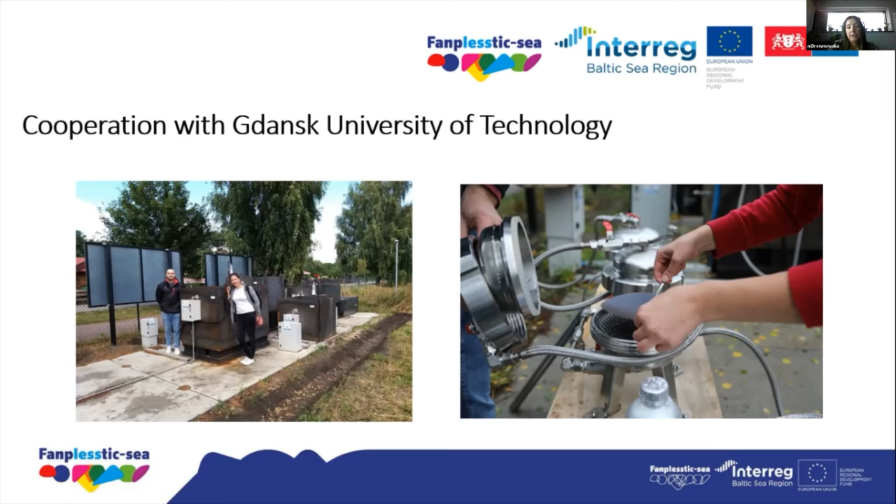And we also got the analysis of the other parameters. We observed that we have a reduction for inorganic nitrogen and total organic carbon. As I mentioned, these are very initial results done last year when the plants weren't fully grown and it was quite a short operational time of our pilot. Therefore, this year we are waiting for more interesting results.

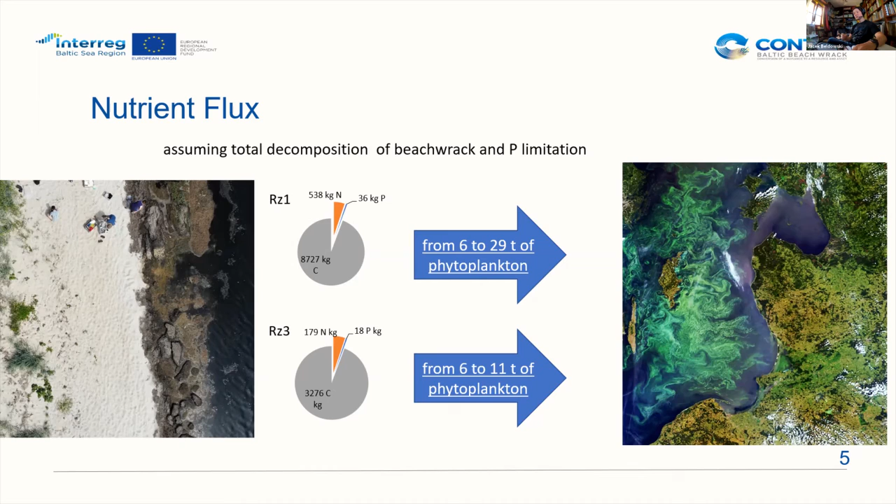And this means that this amount of beach wrack, which is currently shown in the Rzucewo region, can translate to about 6 to 29 tons of additional primary production in the Baltic. So if you remove the beach wrack, then you can combat eutrophication because you remove the nutrients from the system.

And we looked also at other substances. One of them is mercury. And we have seen that in this decaying algae, the concentration is higher than in the live algae, both on managed and unmanaged beaches. And it seems that actually the mercury concentration is increasing in this beach wrack. This means that the concentration is increasing because the organic matter decays and you have less mass, but also it acts like a sponge. It just accumulates the mercury from the seawater, even if it's dead and it's on the beach.

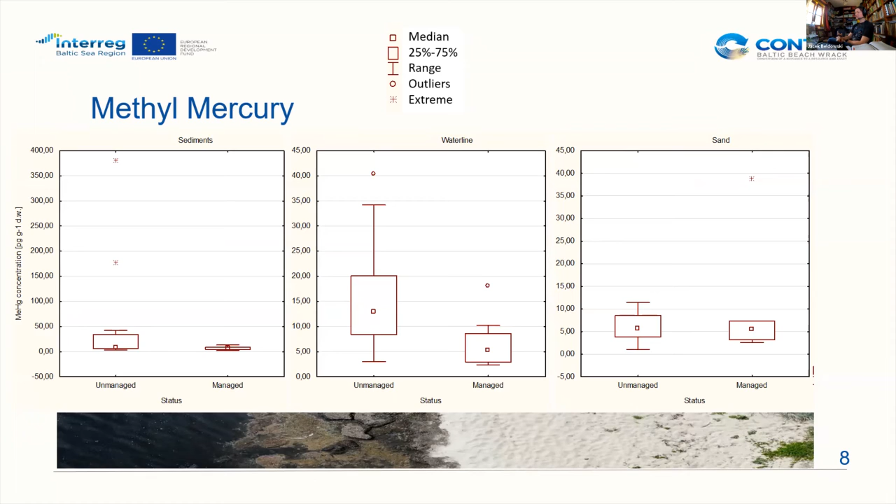Also, organic contaminants behave in a similar way. We looked only at PCBs, PAHs, and nonylphenols, and all are higher on this beach wrack affected beach, especially in sediments directly below the beach wrack, but also in the pore water.

So in conclusion of this case study, I may say that pollution is accumulated, of course, by marine phytobenthos, and after the deposition on the beach, the accumulation progresses, and those loads of contaminants and nutrients are released mostly to pore waters. So if you clean up the beaches, you are in fact cleaning up the Baltic Sea because you are breaking the cycle. And it's a cost-effective method for the semi-natural cleanup of the Baltic Sea.

But of course, beach wrack has got other aspects. It creates habitats for the marine biota and for land biota, for example, for birds, and also for the beach fauna to some extent. Also, it stabilizes the beaches. So it's just one of the arguments pro cleaning up the beaches, but of course it is not the only argument, and possibly it justifies the cleanup of the beaches in touristic areas because you are not only making it good for tourists but also cleaning up the Baltic Sea.

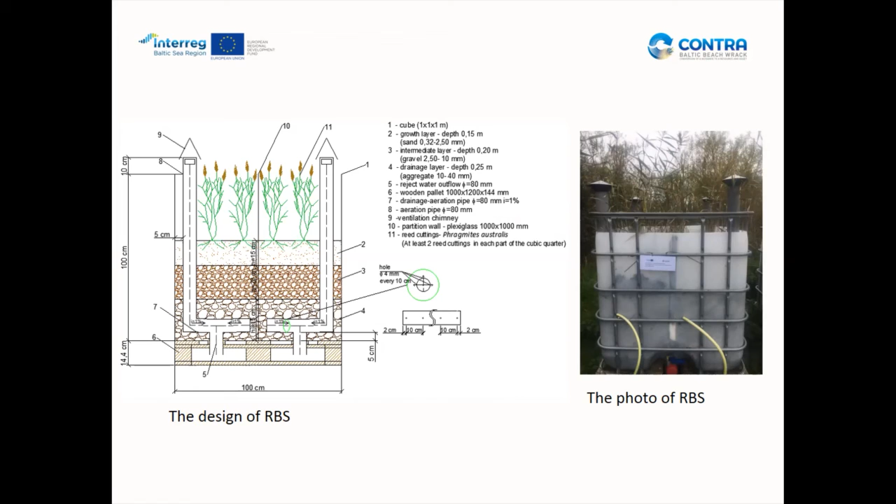We divided our cube into 4 parts. To each part a different dose of beach wrack or beach wrack mixed with compost was supplied. The sample campaigns were conducted once a month from April to October. We determined the quality of beach wrack from the reed bed system as well as the quality of reject water.

It was found that the highest content of dry matter was found in August. In spring and summer period, the content of organic matter was rather low. In autumn, unfortunately, the decrease of dry matter and increase of organic substances took place. It was probably caused by the large amount of rainfall. But based on this result, it can be concluded that the beach wrack from a reed bed system should be removed in the summer.

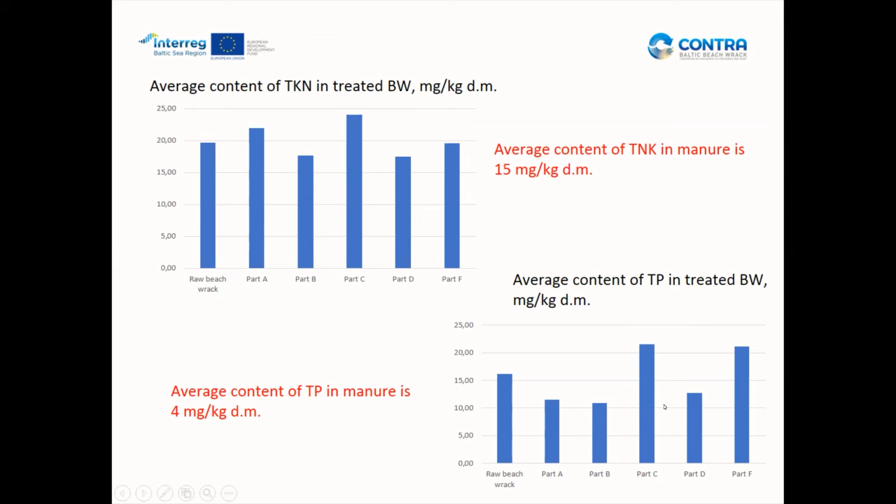When we want to use beach wrack as a fertilizer, very important is the content of metals. The content of metals has to meet permissible values according to law. And in our case, it was found that for most of the analyzed metals, the content of metals was much below permissible value.

And now the quality of reject water. It was found that reject water after drainage through the filter just after supplying of raw beach wrack has composition similar to the seawater. So from the environmental point of view, this reject water is safe.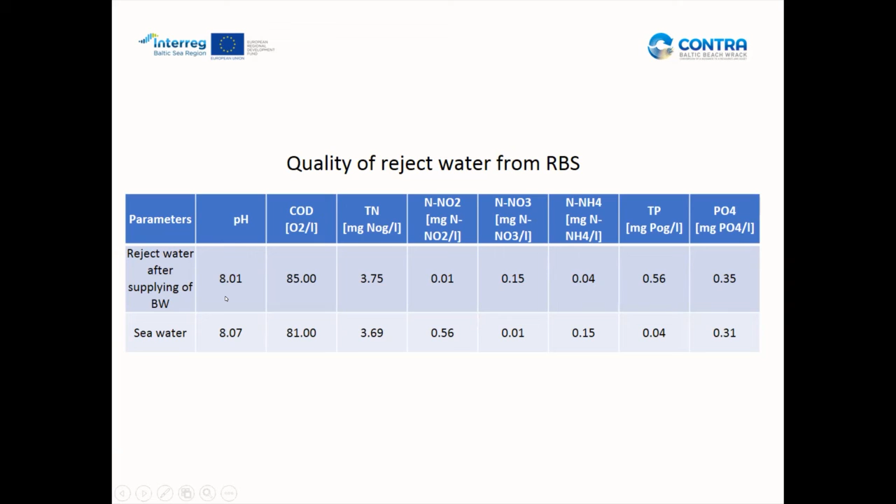And as I mentioned, after one season of the treatment, we did some additional tests with selected phthalates, PAHs, and pesticides, and we did these tests in treated beach wrack as well as in substrate from the filter. We tested 16 types of PAHs, and we didn't find any of them in treated beach wrack and in substrate.

In case of pesticides, we tested 7 types of them, and we found only in treated beach wrack only one type of pesticide. And in case of phthalates, we tested 11 types of them, and only 2 of them were present in treated beach wrack, and one of them, dibutyl phthalate, was found also in substrate from filter.

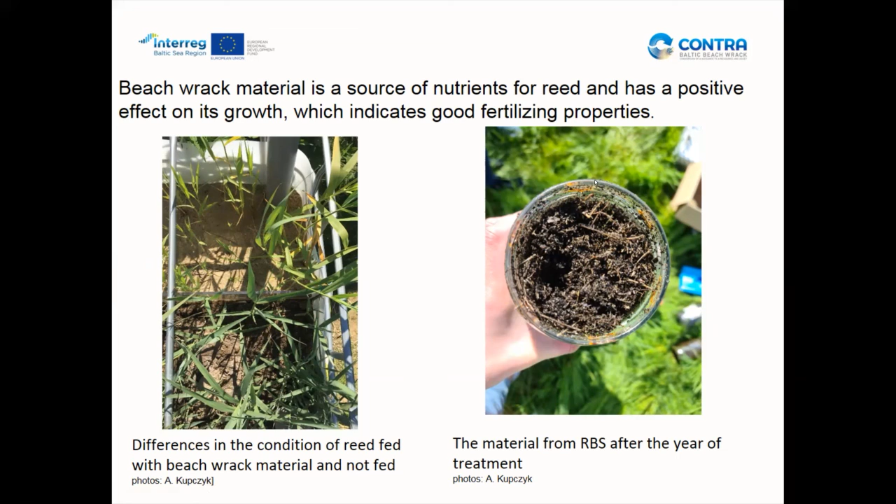And what is important, we found that after one season of the treatment, we obtain material which looks like good quality soil. And now the conclusion. It seems that a reed bed system can be a good solution for beach wrack treatment. It can be constructed near the beach where there is beach wrack.

Beach wrack from the reed bed system is dewatered and stabilized, and as I showed you, it has a high content of nutrients and low content of metals and other toxic substances. That's why it can be considered as a fertilizer.